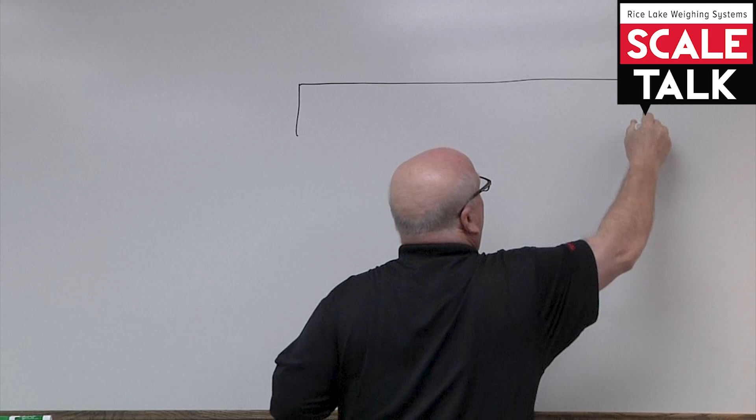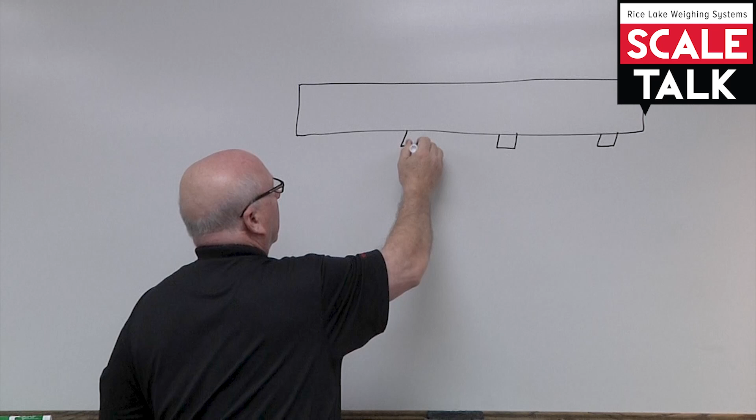One of the things that we'd like to ensure is that when you are jacking up a scale, this is, for example, the weighbridge steel in a scale, and let's say this is a section, this is a section, here's a section, and here's a section. There's a lot of different ways to do things, and it may be your philosophy to build a cribbing right here and jack up and work on these two sections at the one time. As long as you're doing things safely, I'm not going to say there's anything wrong with this.

I think in talking to managers of scale companies over years, it's sort of inferred that it might be a little bit safer to work on one section at a time. I think people have less safety events or less incidences.

We want to be sure that when we're building our cribbing, there's really just a couple rules to follow. Good square, rectangular, hardwood, whatever you have. And then as we build that cribbing, the next level of our cribbing is going to be slightly inside as we go up. There's going to be scenarios where obviously there's an example of a terribly non-level cribbing. We might use small pieces of wood to make sure that our cribbing is level.

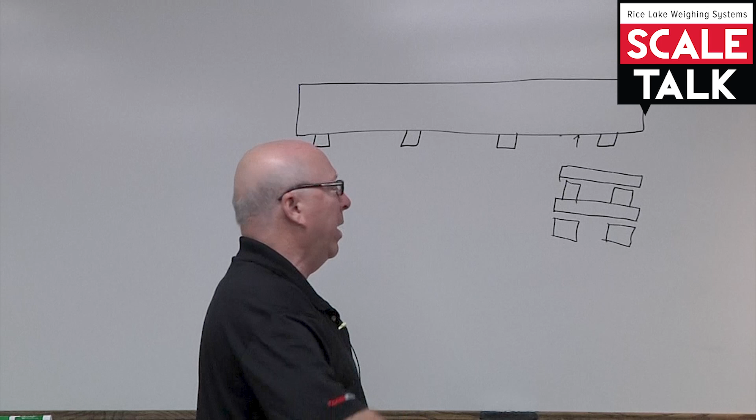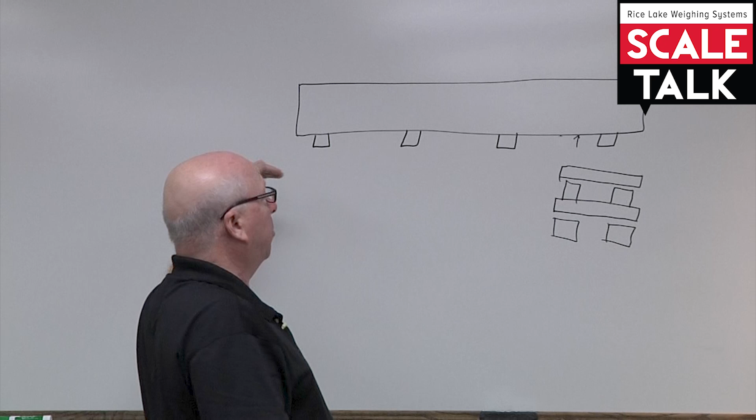Depending upon how high we go, I've seen instances where we have to jack the scale up a long way. Let's say we were doing some weighbridge steel repair, or it's possible that we might even be sandblasting, painting, priming the weighbridge. So if you've got to go a long way, one of the things that probably needs to happen is you don't want to get too greedy. You need to take it up, say 8 inches to 10 inches here, and then work your way down the scale and back on the scale.

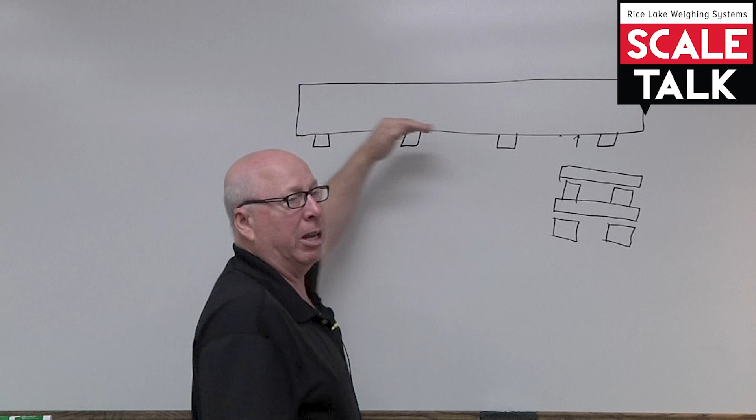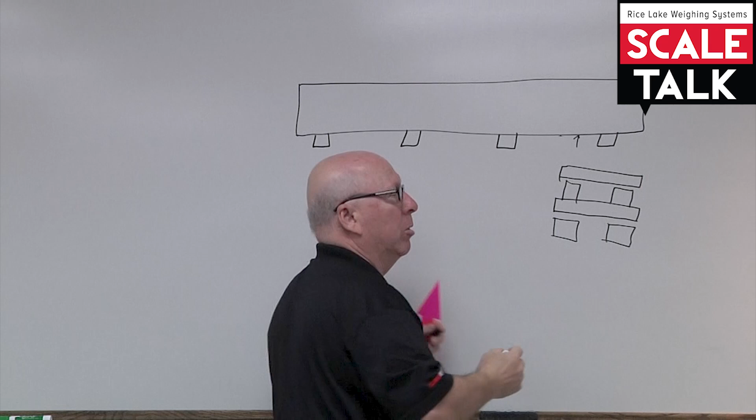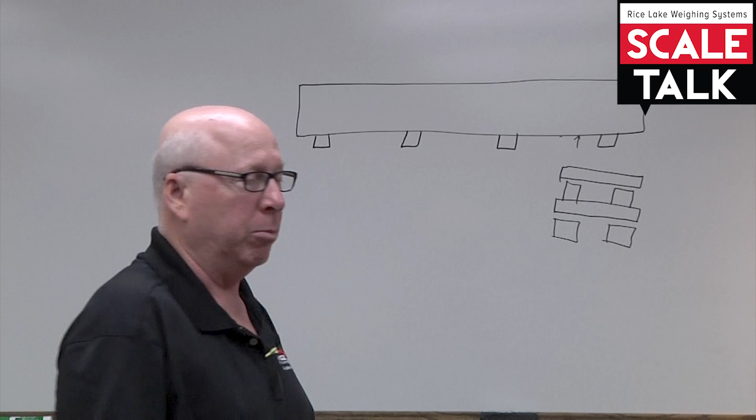And when you get in those really, really tall cribbings, one of the things that I've done in the past is taken 2x kickers and have them go all the way across the scale, toenailing them into the cribbings on both sides. That really braces up your cribbing, doesn't allow it to move. In many cases, someone would build their cribbing and use a jack right here. Jack and cribbing.

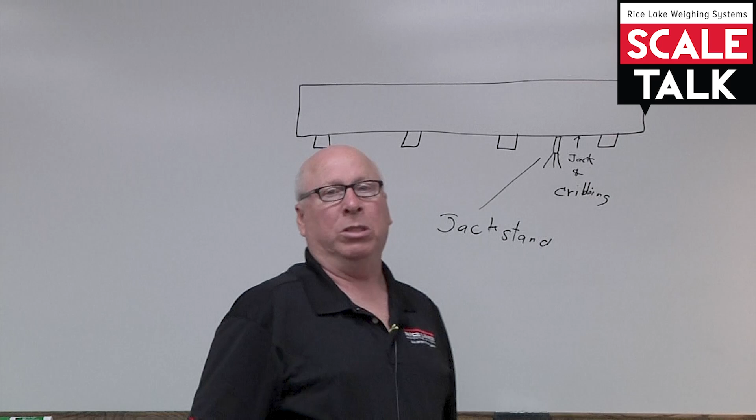There are a couple of things that would be pretty common. For safety's sake, they might use a 3-legged jack stand in conjunction with their jack. We don't want to depend just on the jack. It seems that's when something will leak down and somebody's finger will get in trouble.

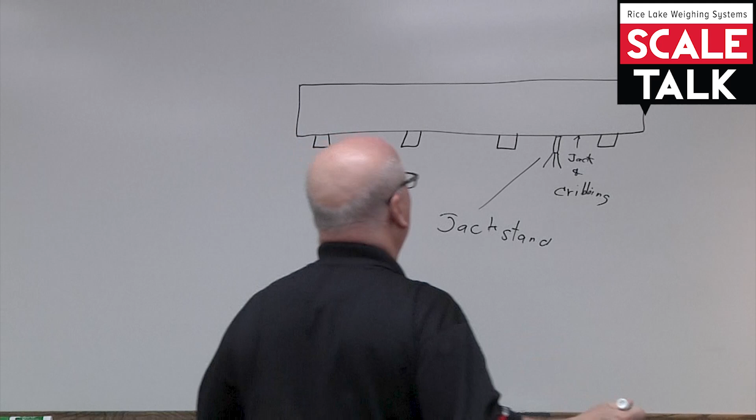One of the things that we always want to be sure of is this is again weighbridge steel, and your jack stand is also steel. So we want some sort of wood, whether it's a plywood, 1x, or whatever you can get in there. But you always want to put some wood between the two pieces of steel.

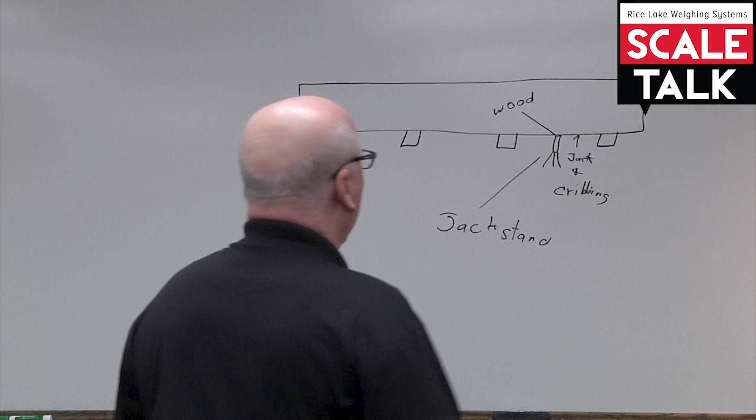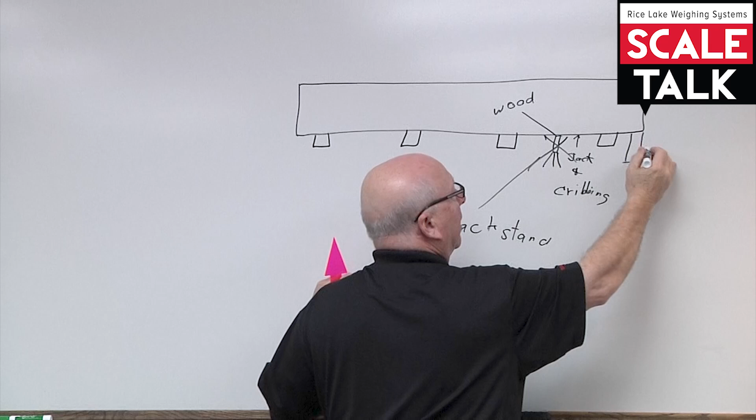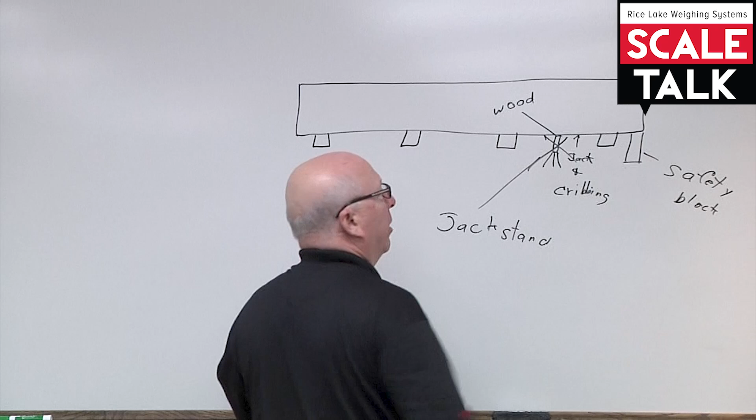If you're not using this jack stand, then one of the favorite things to do might be, once you jack this up, to take a piece of wood and go all the way out towards the end of the weighbridge steel, standing up an appropriately lengthed piece of wood or shimming this, and this would just simply be a safety block. And obviously do that on both sides of the scale. Whatever you do, you're going to do on both sides of the scale.

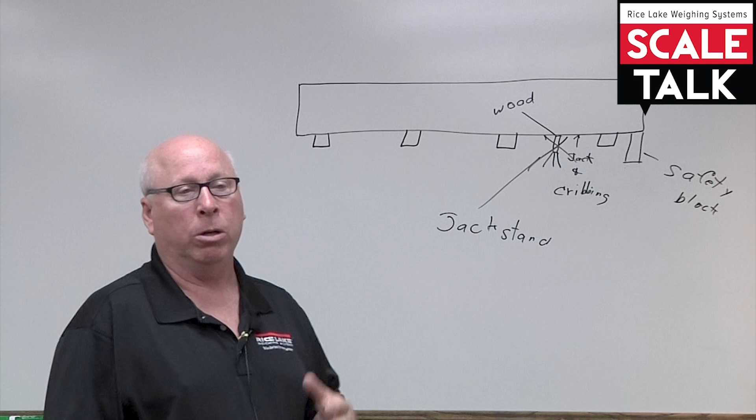I urge you to make sure that you're abiding by safety rules whenever anybody is knocking parts out of a scale or knocking parts into a scale. Make sure that everybody's wearing safety glasses, not just the guy that's knocking the parts in or out. Everybody in that immediate area is wearing the proper safety glasses, side shields, whatever, when you are beating two tools together or beating pivots and bearings in or out of a scale.

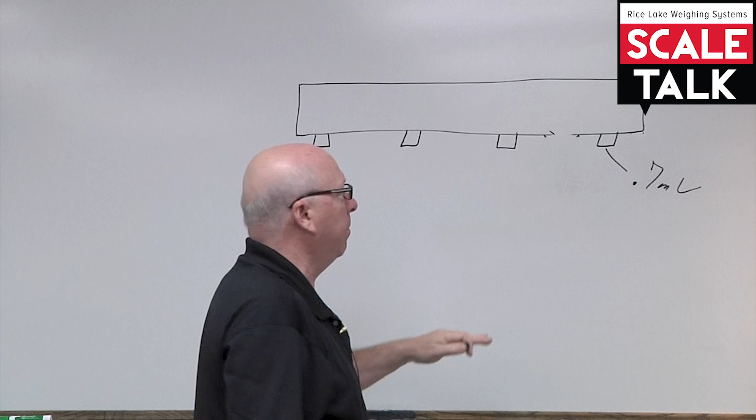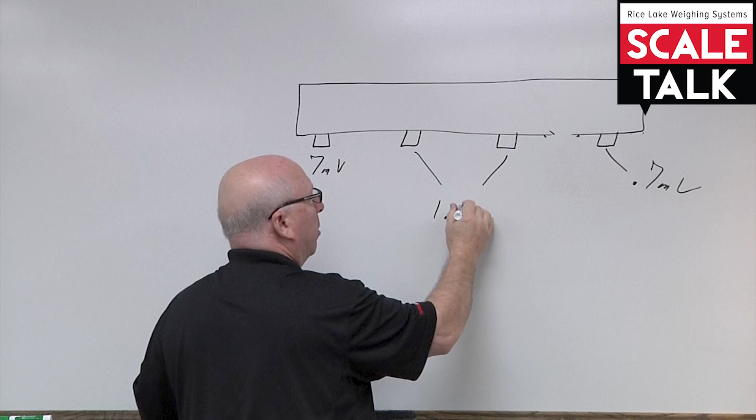There are a couple of other things we'd like to cover just for general knowledge. And again, my experiences here are more with a Rice Lake scale. We have new technicians, and let's say this was a full electronic scale. One of the things we might like you to know is that these end load cells, if for whatever reason you need to check them, would each be probably about 0.7 millivolts, while anything out here in the middle would probably be about double that, 1.3 or 1.4 millivolts. This would be just the amount of dead load in terms of millivolts in a standard Rice Lake scale, just in case that ever helps you.

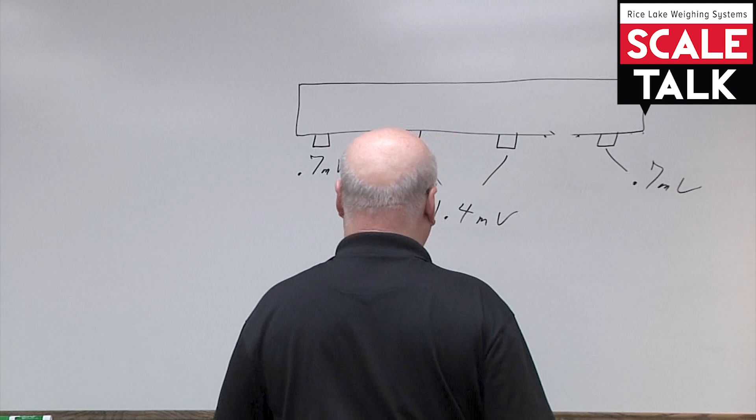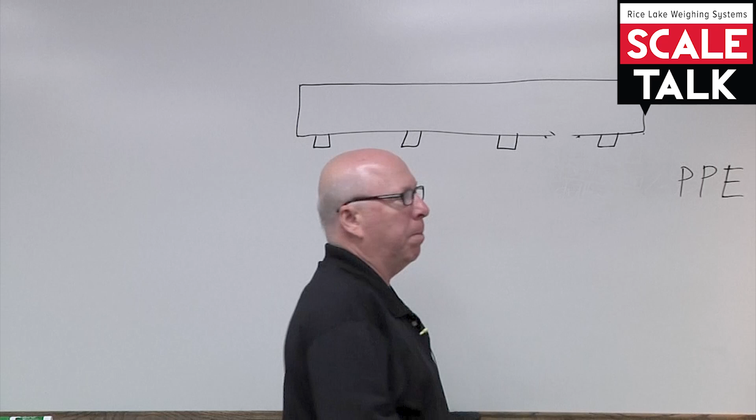We'll go away from that now and talk a little bit about grouting. One of the things about grouting that you want to be absolutely careful of is your personal protective equipment. I've seen a lot of grouting done without glasses, without side shields, without masks, without any gloves or barriers for hands. And that grouting, after you do a little bit of that, will dry you up pretty good. So we want to be sure everybody's using their personal protective equipment.

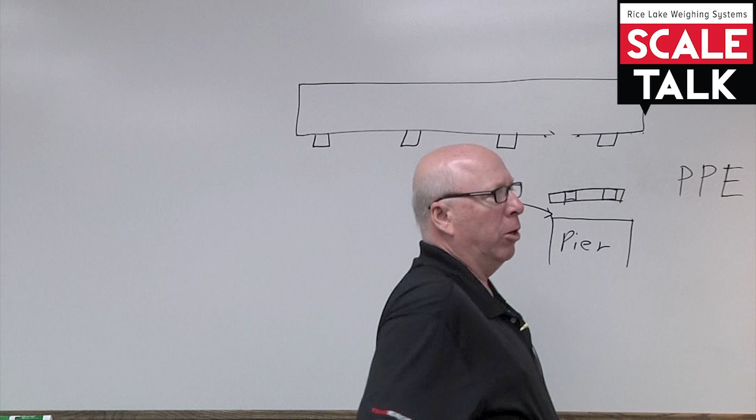In any sort of grouting of a fulcrum stand, there's always a scenario where, say, this is the pier and this is whatever the fulcrum stand consists of. One of the things that we want to be absolutely sure of is, if you have less than 1/2 of an inch here, you better be really, really careful. No matter how wet or watery your grout is, it is very hard to get grout in this area right here, between the fulcrum stand

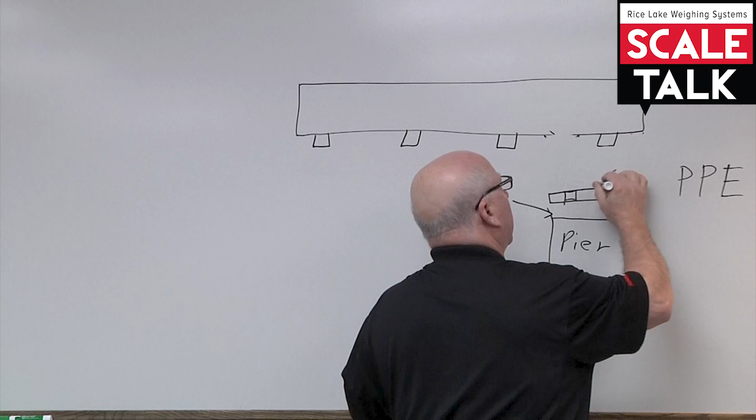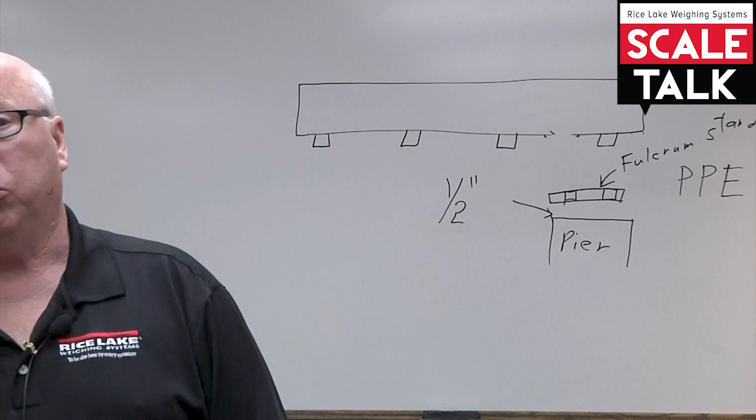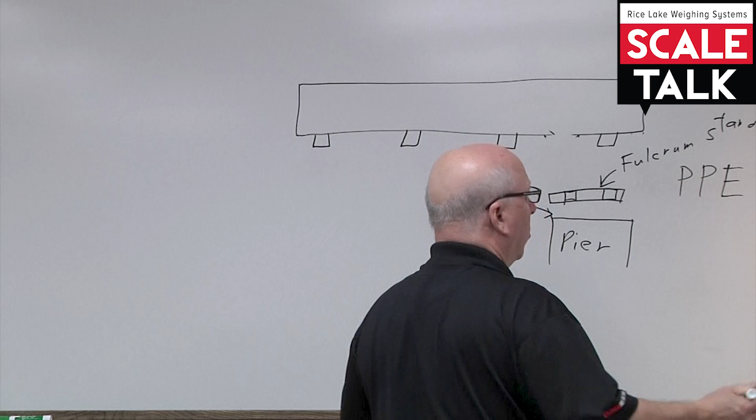and the pier. If you don't have at least a 1/2 inch, and I mean if you have a 1/4 inch, it is virtually impossible. I don't care how wet it is, it just doesn't really flow in there like it should. So a lot of scenarios happen these days where, because we have the ability to simply shim sections in a full electronic truck scale, in many cases the fulcrum stands are set down on the piers and then shims are used. But I'm sort of old school. If it needs to be grouted because the pier is not sitting exactly as it should, that's kind of an important deal.

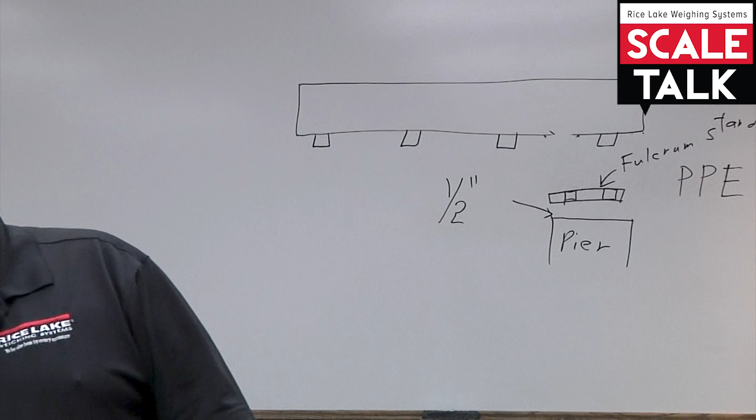All right, so we've talked about grouting and jacks and cribbing and bracing, jack stands, safety blocks. There's a couple things about working on a scale that I really suggest you be aware of, and one of them is that if you're doing anything in a scale, you need to be able to see well, you need good lighting. And obviously in scenarios where we might have some water in a pit, we want to be very, very careful of extension cords and lighting. If I'm doing some work in a scale, I'm going to want 3, 4 clip-on lights, a few extra bulbs, so that you can really see what you're doing.

We'll talk a little bit about jack up and grease jobs, but on the initial installation, one of the things that I almost always wanted to happen was, once the lever system was installed, then the weighbridge and the cross members would be added, and then the bracing for the deck coping would be done. And at that point, when we're about to cover up, maybe before you put the tin across the weighbridge for the bottom of the deck, I'm really going to suggest go back and look at the alignment of all of the links if it's a mechanical scale, make sure the pivots and bearings are seated properly, make sure you don't have a pivot and bearing that's out, because even though it was in at one point in time, bouncing that weighbridge, those big beams, it's easy to knock something out. So we want to be careful at that point in time.

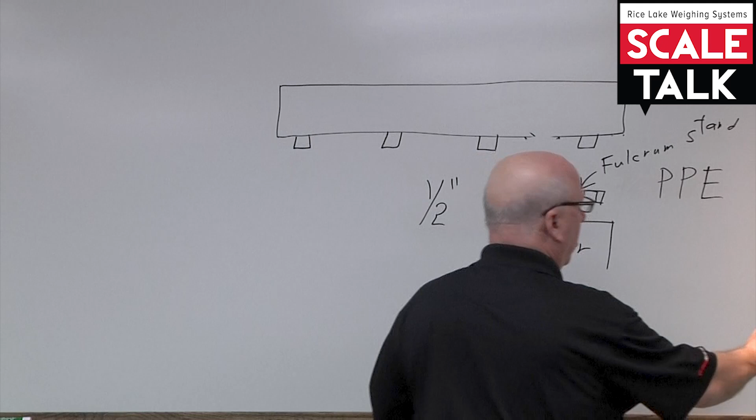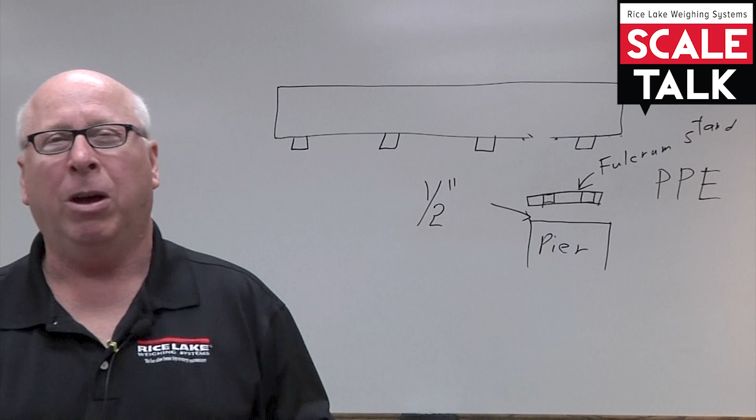Again, when you do have a pit full of water, we talked about levers floating. Obviously, levers are not going to float, yet they do have a certain amount of buoyancy. So when a pit is full of water, the range behind zero for many indicators can be very, very narrow. So it's not uncommon that a scale will blank out or go behind zero when the pit's full of water. So when someone calls you and says, hey, my scale is behind zero, all it says is minus or under, a lot of our indicators do under dashes. Okay, well, maybe take the top off the manhole and take a look in: does it look like the pit is full of water? Now that brings up a couple of other things. Again, water and electricity don't mix very well.

So when we are putting a pump down into a hole, or if the pit is full of water, in many cases I would suggest a totally sealed pump, the right type of pump, with maybe a 20-foot discharge hose. If it's got a 10 or 12-foot electrical cord on it where we don't have to make a connection down in the pit, that's nice.

It's nice if it has its own trigger or its own actuator, so that all we've got to do is let that pump down into the pit itself, and it'll simply start pumping and carrying water away from the scale. It can take a long time to pump out the water in a 60-foot scale.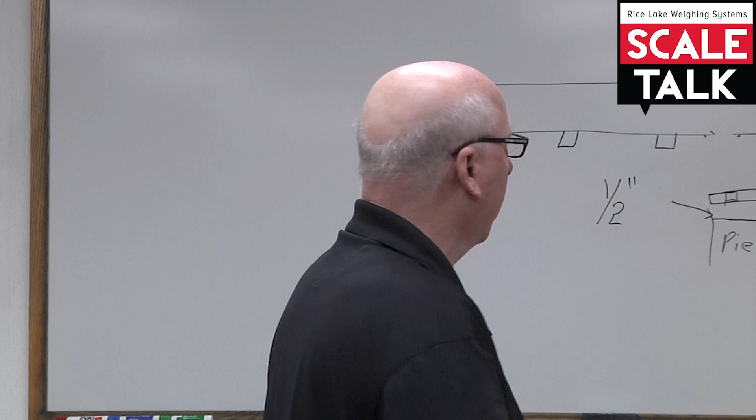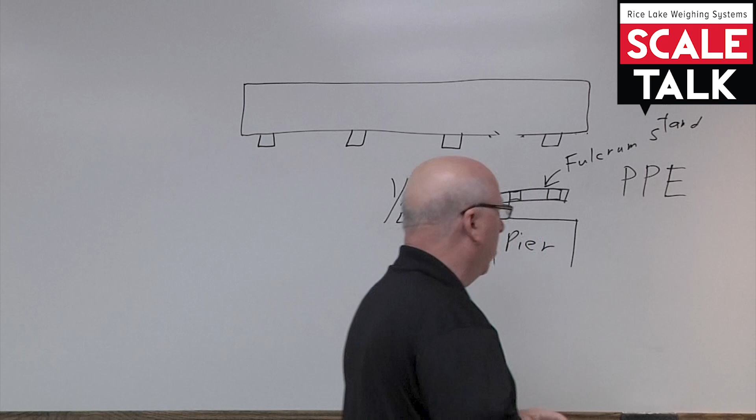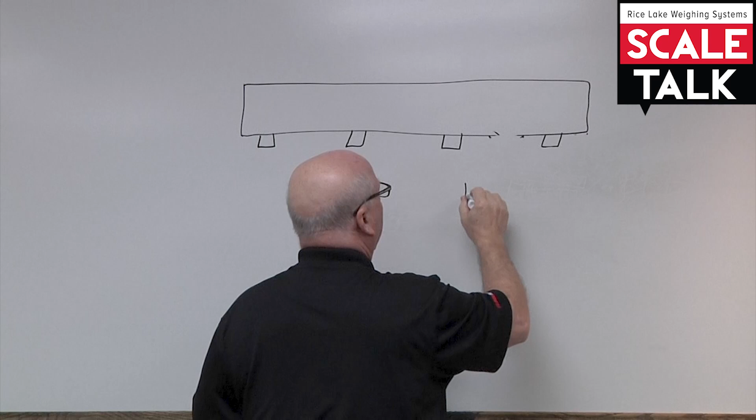In certain scenarios over the years, I've seen pits where the walls will actually begin, let's say, I'll change this around a little bit. We're looking at an end view on the scale, and let's say we have our deck here, and the deck is on some weighbridge steel, and these side walls, it's probably a 6-inch wall on both sides of the scale. I don't know how much I'm drawing it to scale. Because of poor soil conditions, they can begin to move in a little bit.

I want you to be aware that if the need arises, you can take a wood block and a hydraulic jack and put it down, and you can jack these walls out. My advice after that would probably be get some adjustable basement supports, because even if you just jack it out, you're then going to need to support it.

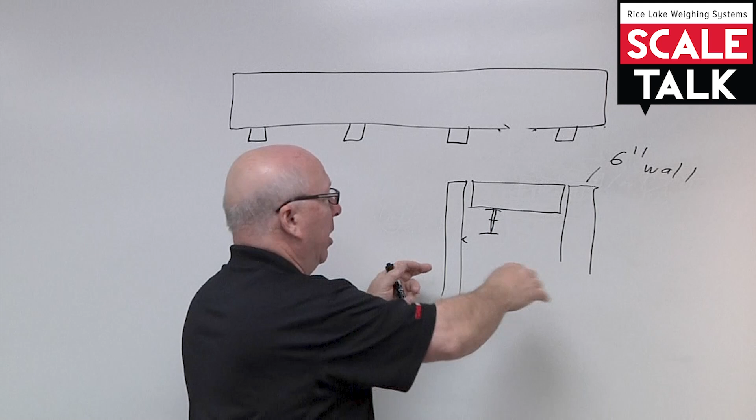I've seen a couple different scenarios here between here and here under the weighbridge, and I've seen where people have cut out holes in the weighbridge, and you want to keep those as small as possible, and you definitely want to have clearance. You can do that one of two ways, but if the wall begins to move in on a scale, another thing to be aware of is this little,

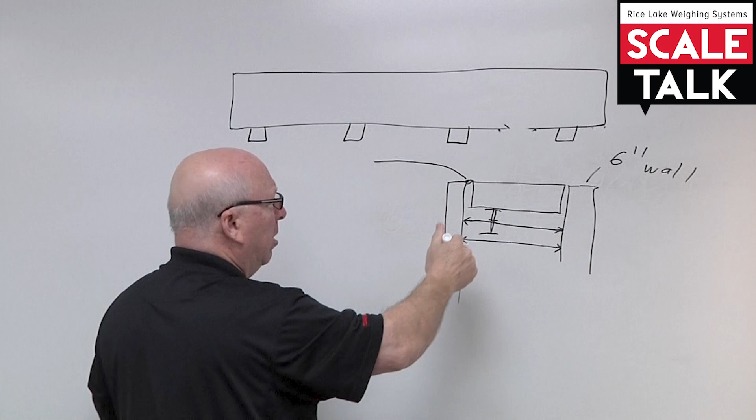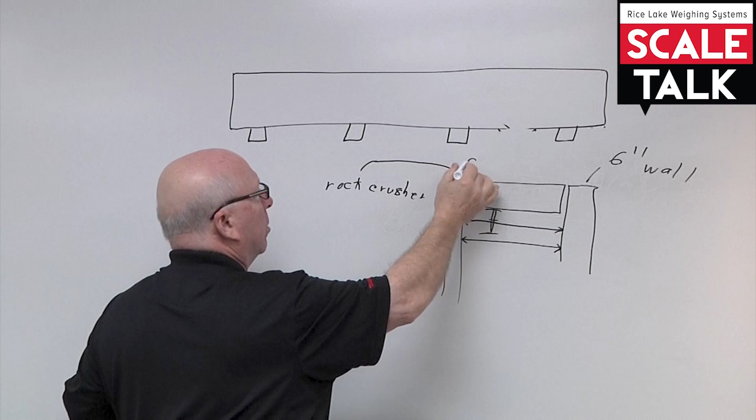as a part of the deck coping, there in many cases is a rock crusher, C-R-U-S-H-E-R, and it could be round or it could be square, but in certain scenarios, if it just gets a little bit tight here, you may just grind a little bit of the rock crusher off, or you might take a torch and cut some of it off. You could do either one of those things, but it's not a big deal.

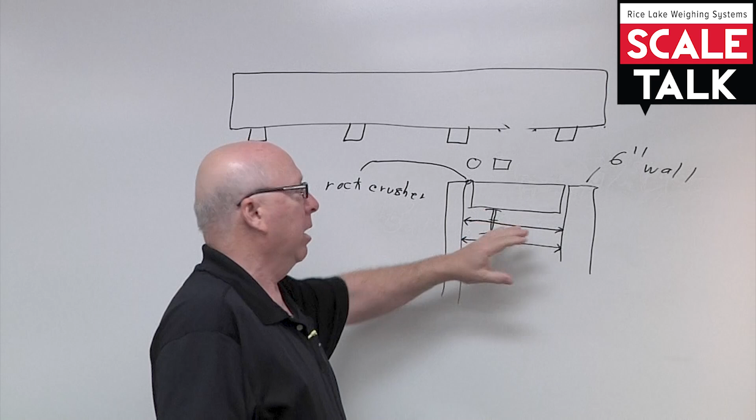Now, if you've got a 60-foot scale and the walls are moving in on it, you're probably going to need 3 or 4 braces from center going each way to keep those walls held out. But I've done that a couple of times, and it's not a terribly rough job.

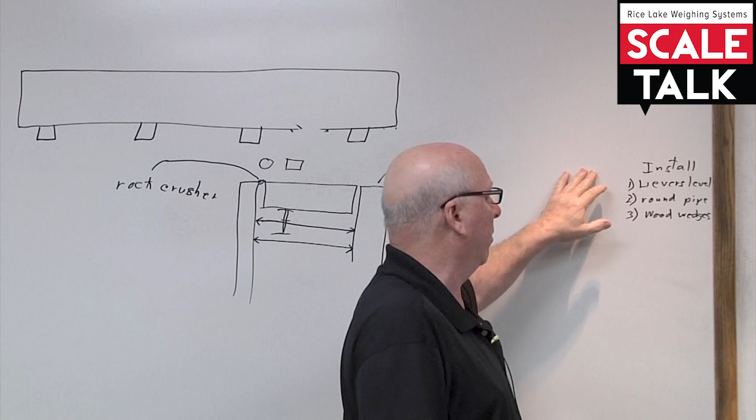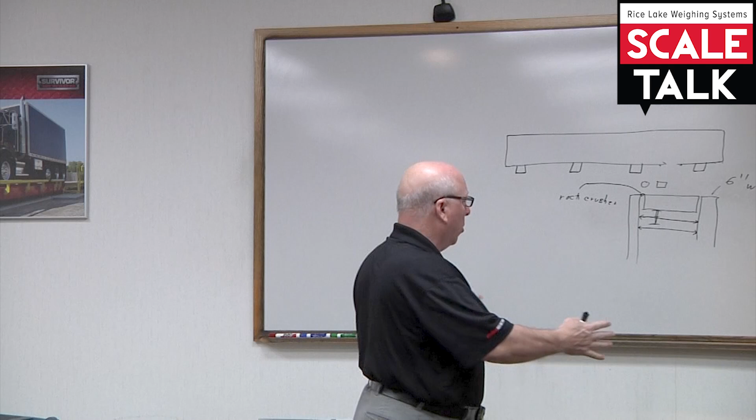On the initial install of a system, we've talked about the scale being level and levers being level. One of the things that I think is kind of a newer fad, so to speak, because so many scales are above ground, is just taking a proper height or diameter of round thick-wall pipe and putting it under the weighbridge steel until everything is located or centered up between the approaches. It's now becoming a pretty popular thing to do.

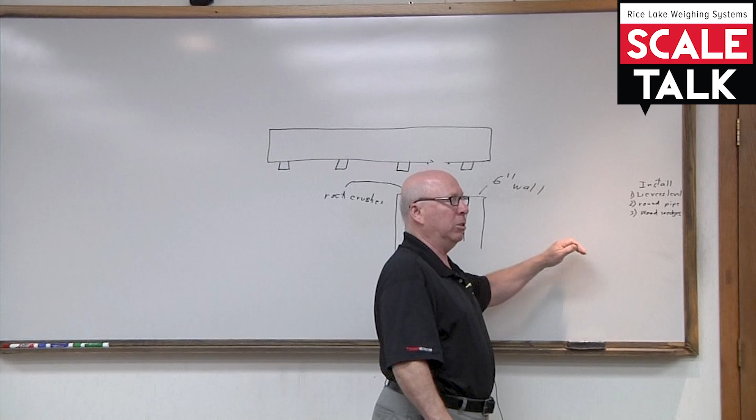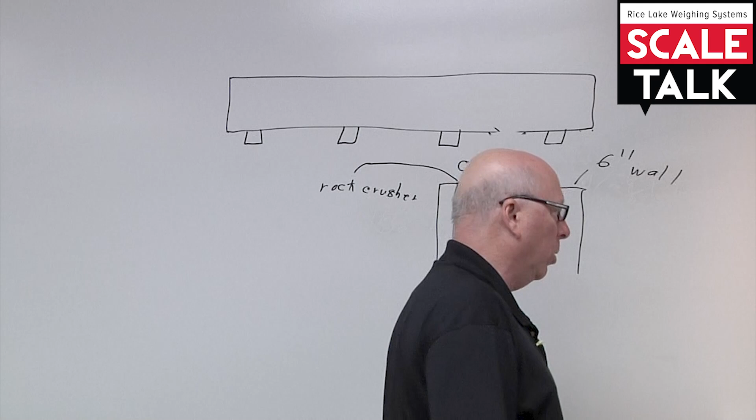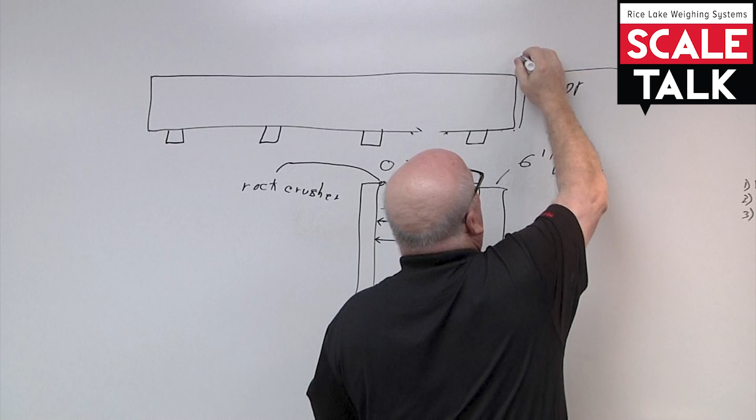That pipe allows you to put all of your sections together and have them fit or float freely, and you can still move it around very easily with a little crowbar on the end. And then once you get the scale centered up between the approaches, you might take some wood wedges and just push them in between the scale and the approach so that the scale doesn't move around anymore. It's going to roll around pretty freely, but a couple of wedges in each end will stop that scale from moving. And now we're ready to locate all of our load cells and chairs and everything in the scale.